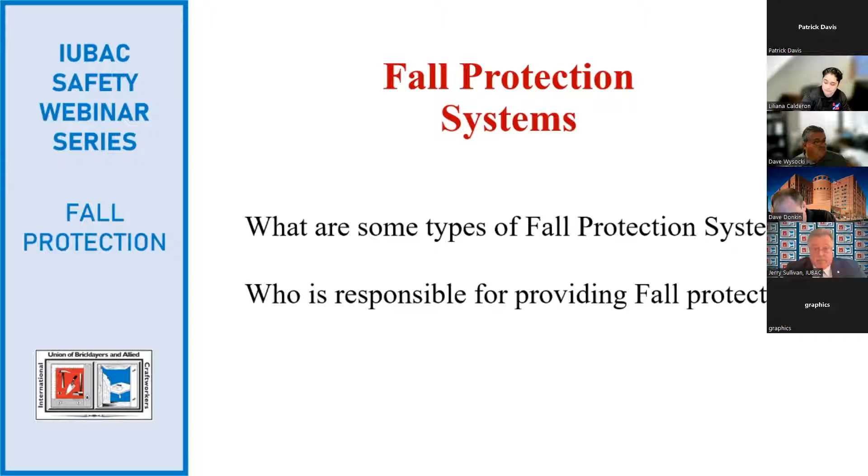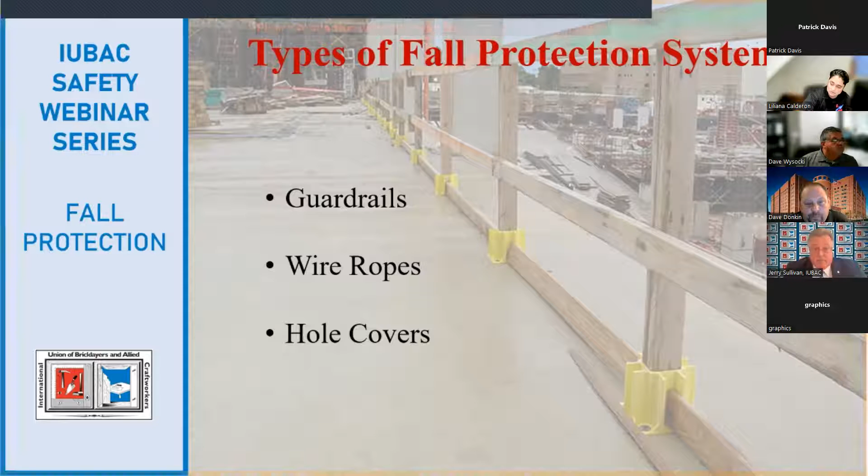So fall protection systems, I'll be covering fall protection systems. Here are 2 questions that you can answer yourself in your head, see if you get any of these right. What are some types of fall protection systems, and who is responsible for providing fall protection? So that's question #1. Types of fall protection systems: we have guardrails, wire ropes, hole covers, and here are some pictures to show you that.

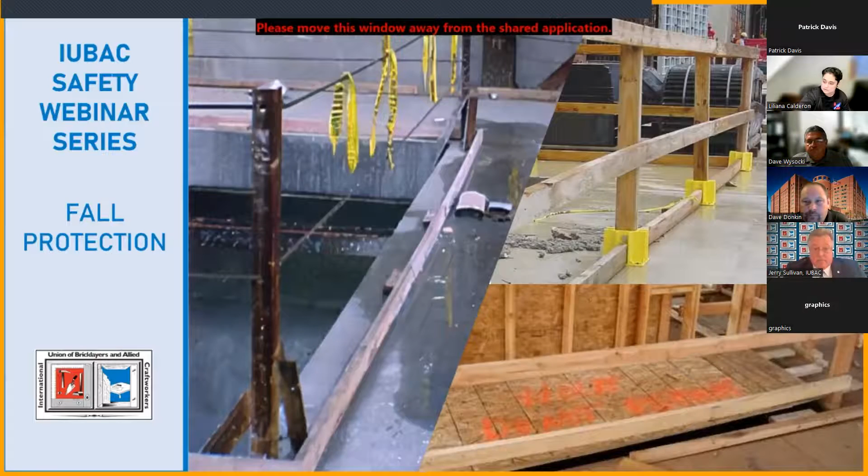So the second question. Lily, I hate to interrupt you. We're getting a little message that says that there's a window on top of your PowerPoint. Are you using the mouse to forward, or are you using your arrow buttons?

My space bar. Because I think it's opening a Zoom window on top, and we're getting a little error message. So if you try using your arrow buttons, it might not bring that window down on top, because on our end it's saying move this window away from the screen or something like that. Okay, thank you, Patrick.

So second question, who is responsible? OSHA standards state, which you can find in 29 CFR 1926 Construction Industry Regulations and Standards book, you can find these there. The 1926 502A2 says the employer shall provide and install fall protection systems.

I'm just going to read them down. The second one here is an excerpt: the employer shall provide a training program for each employee who might be exposed to a fall hazard. The third one: the employer shall ensure that each employee has been trained as necessary by a competent person, qualified in the following areas: the correct procedures for erecting, maintaining, disassembling, and inspecting the fall protection systems to be used.

So the employer should be training you as a worker to use these. You can't possibly use the controlled access zone or guardrails properly if you don't know what you're looking for, right? If you don't know that you're supposed to have a mid-rail or toe boards, the employer needs to train you.

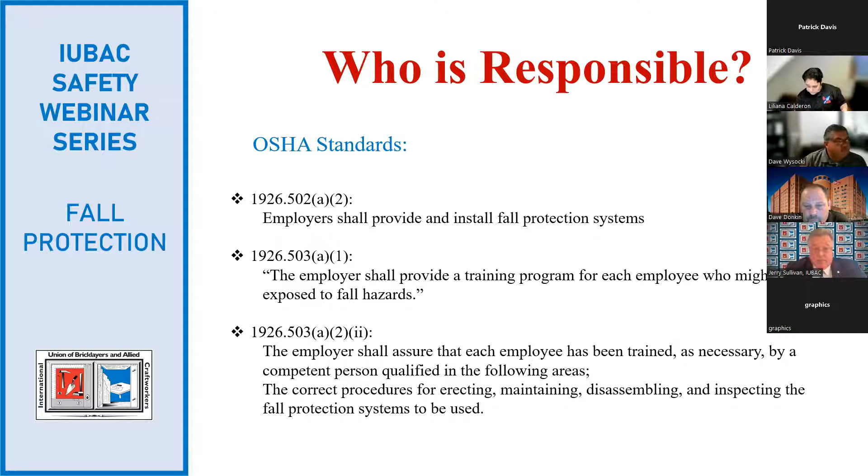So when do we use guardrails? Typically, we need to use them at the edge of a roof or at the edge of a leading edge. I know I've seen them around at every job site most of the time. If the general contractor is on their up to par, they'll provide it at any leading edge, right?

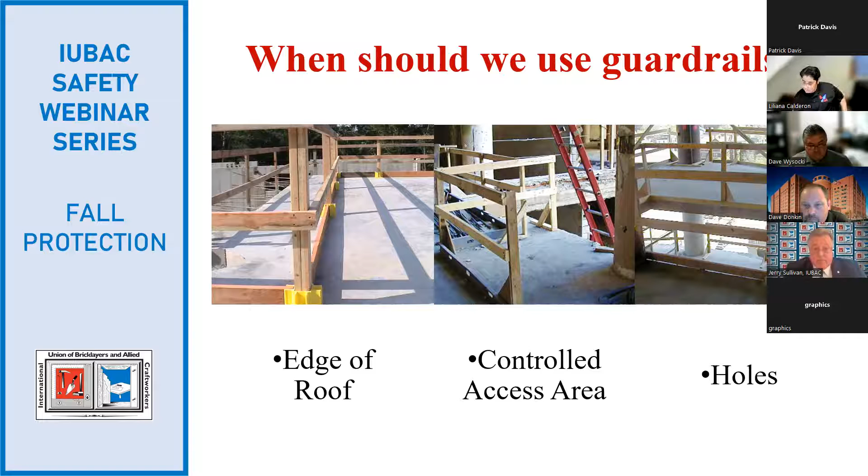So what are the guardrail system basics? You can find the regulation in 29 CFR 1926 502B. We need an upper rail. The upper rail needs to be 42 inches plus or minus 3 inches, so anywhere between 39 and 45 inches, and it needs to withstand an outward or downward force of 200 pounds.

Then we need a mid rail that has to be between the upper rail and the working area surface, right? So typically right in the middle, or at least 21 inches, and that needs to withstand 150 pounds inward or outward force. And then we need a toe board. It needs to be up about 3.5 inches, able to withstand 50 pounds of force.

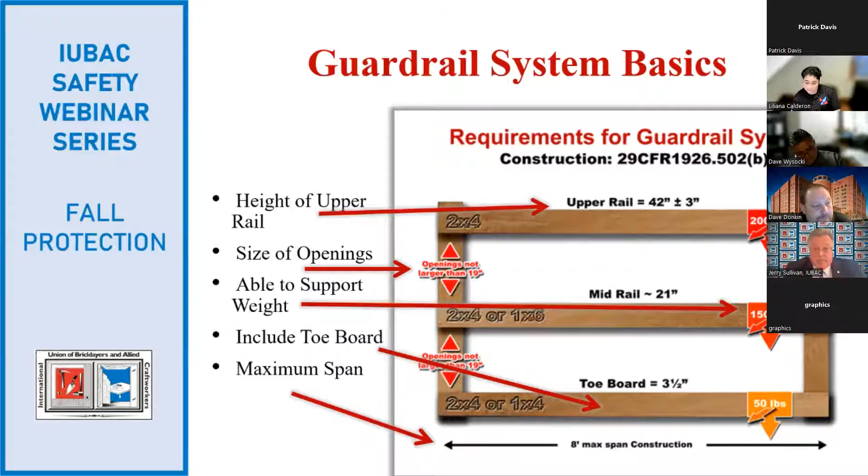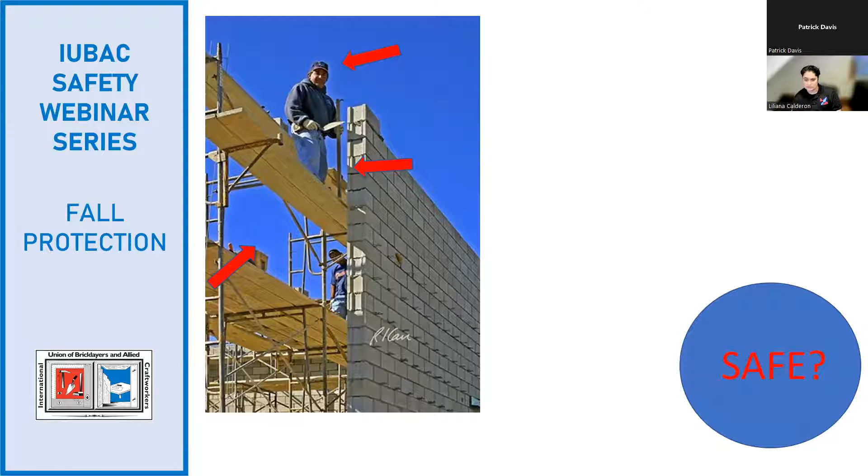If he were to just lose a step for a little bit while he's plumbing his wall on the back end, what happens? He falls, and he's not up a foot, he's up there. And the third thing we see here is there's no X braces in the back. That worker behind, walking on that platform, can trip, lose his balance, and fall over, creating a fall hazard.

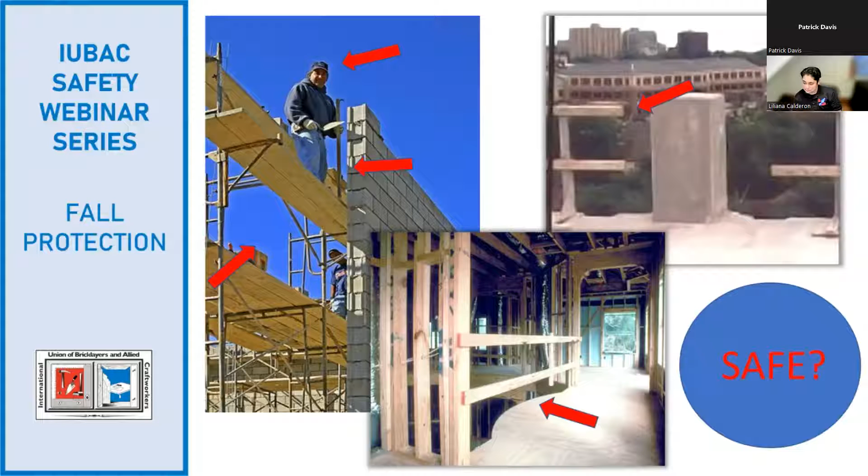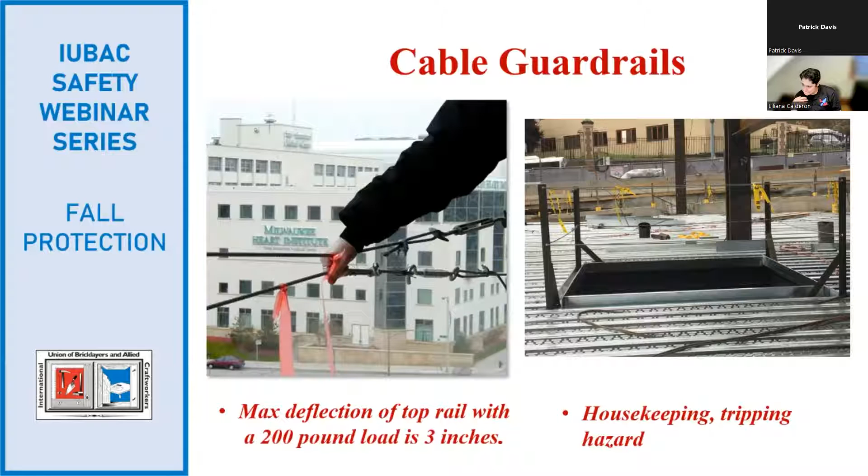So just like wood guardrails, the top rail cable system must be at least 42 inches high and resist up to 200 pounds. Wire rope needs to be secured and taut, like I said earlier, and should not have sharper edges, burrs, or projections.

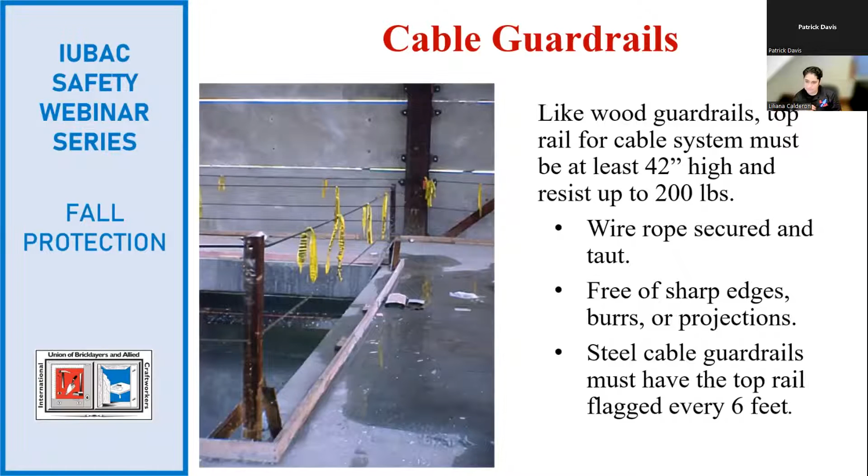Next, hole covers. A hole is a gap or a void of 2 inches or more. When we cover our holes that are on the ground or in openings on the wall, they need to be securely fastened, and they have to be clearly marked hole or opening.

What happens on the job site? Someone needs a piece of plywood, and they see one laying there. It's not marked. They pick it up and take it away, creating a hazard for someone else, because now that hole isn't covered. Or it can create a hazard for yourself, because you might forget it's there since you took that piece of plywood. So we need to make sure they're securely fastened and obviously marked, so that doesn't happen.

These are just some of these fall protection systems. Next, Patrick Davis will go over personal fall arrest systems.

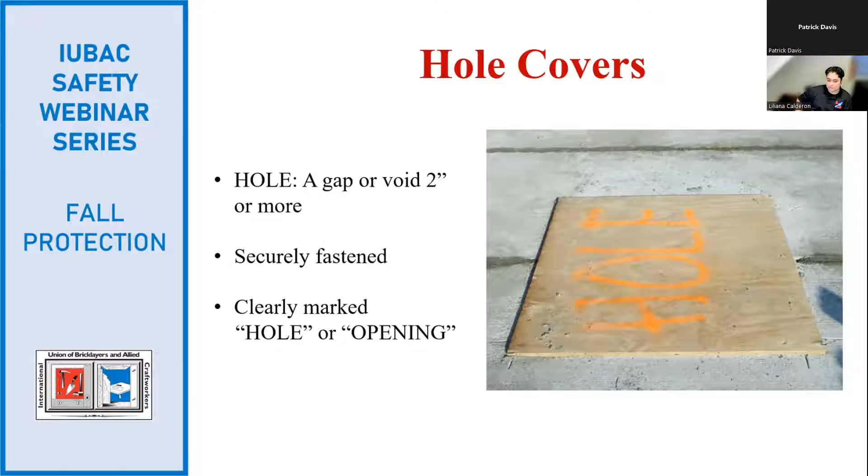All right, thank you, Lily. So like you said, Lily went over the conventional fall protection, meaning guardrail systems. So I'm going to go over personal fall arrest systems. This is one option.

Give me one second here. This is one option of protection after controls have been put in place, or when such controls are infeasible. Next slide.

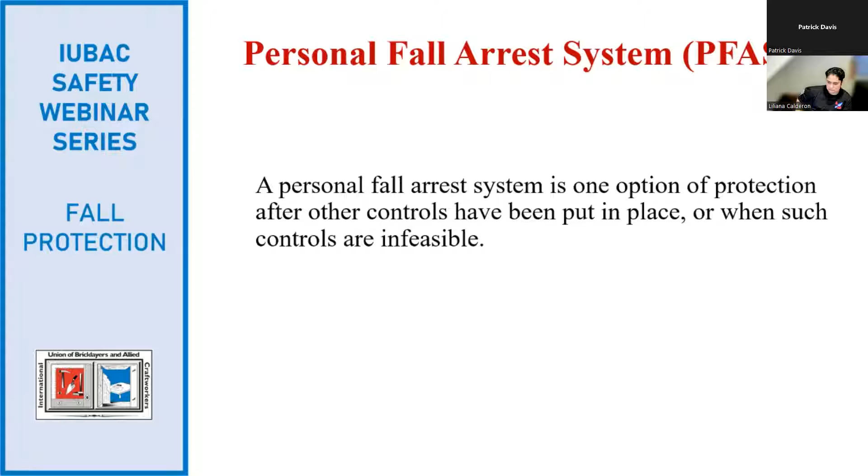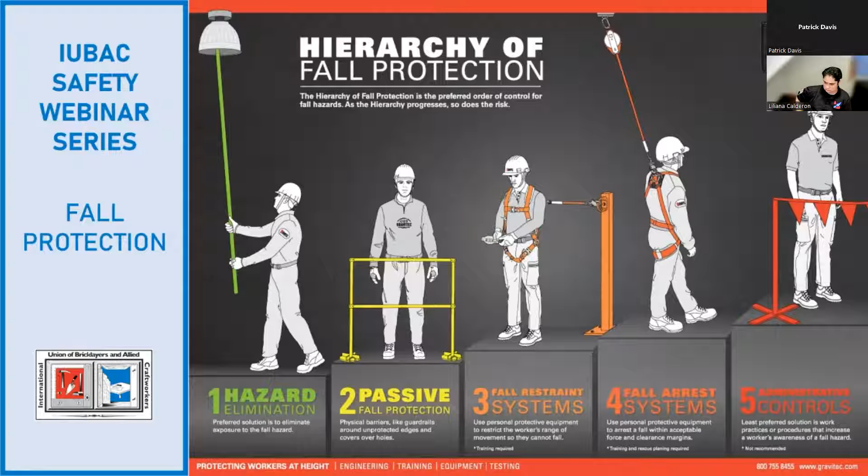Furthermore, in one of four of those falls, they weren't even using it at the time of the fall—meaning they might have had it on but weren't connected, situations like that. And then about 70% were among residential contractors, including roofing, siding, and some sheet metal sector contractors. Pretty staggering statistics. Next slide.

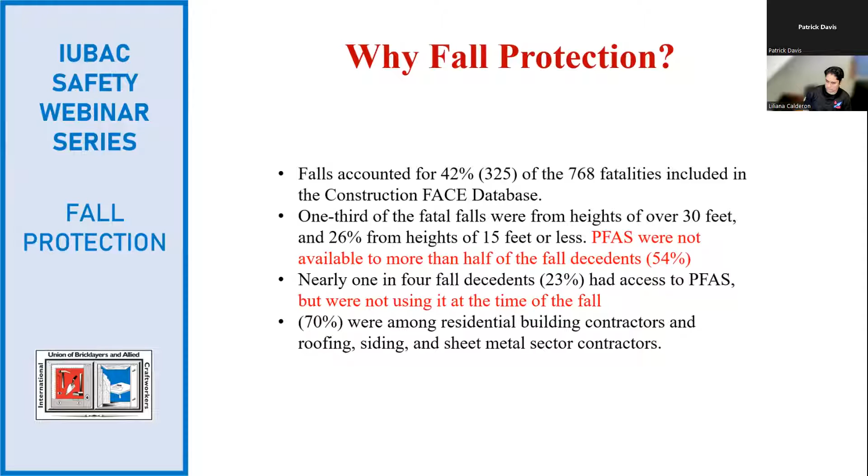So we're going to go over this for a little while. It used to be the ABCs of fall protection. They've kind of increased that a little bit to add more components of what's considered a personal fall arrest system. So we're going to go over the A, B, C, and yes, even the E's of personal fall arrest systems.

These are all examples. In 1926.502, anchorages shall be independent of one another. They must support at least 5,000 pounds per employee, or be used as part of a complete PFAS which maintains a safety factor of at least 2 and is under the supervision of a qualified person, meaning that qualified person must be supervising at all times if you're just going to maintain the safety factor of at least 2, right?

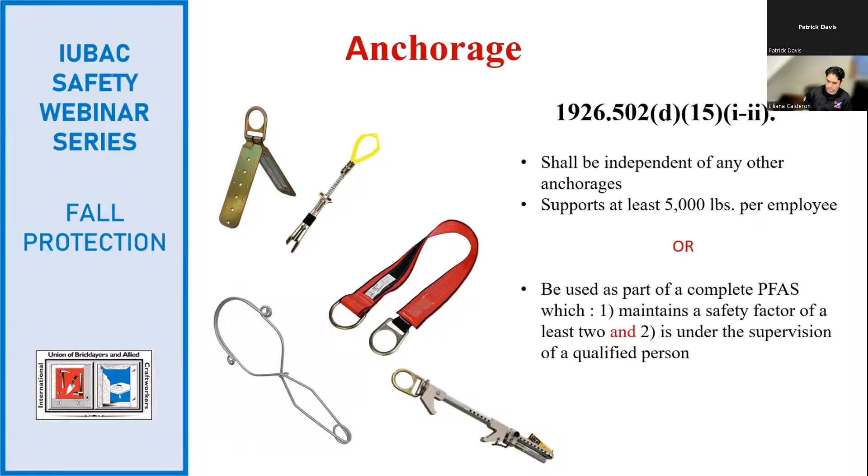As you can see right there, they're not independent, right? They're not tied to each independent anchorage point of at least 5,000 pounds. As a matter of fact, they're tied together. So if something was to happen, not only is one guy falling over, he's bringing his buddy with him.

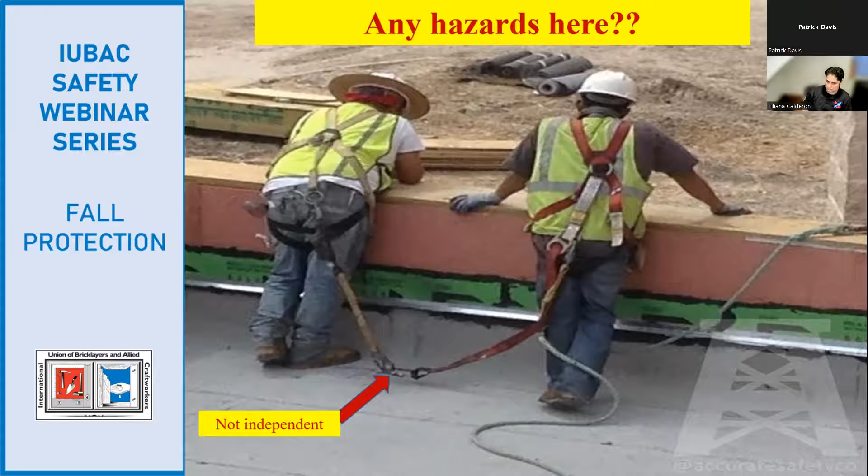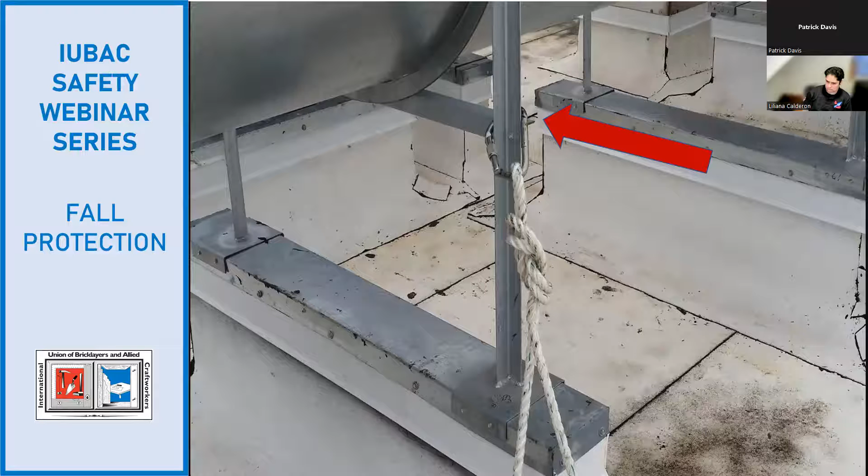Just as mentioned about meeting the 5,000 pounds for an anchorage point, as you can see right here, you simply have a carabiner hooked to a basic 1 inch by 1 inch piece of metal strut. It's unfathomable to think that this possibly meets the 5,000 pound requirement per the OSHA standard.

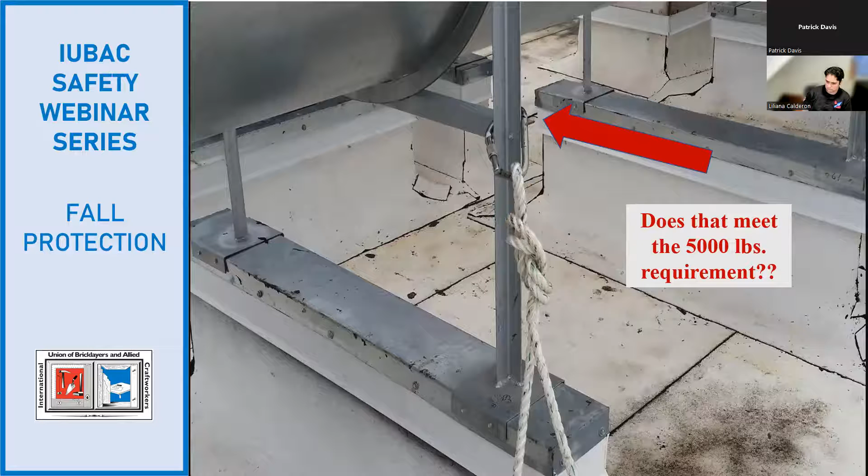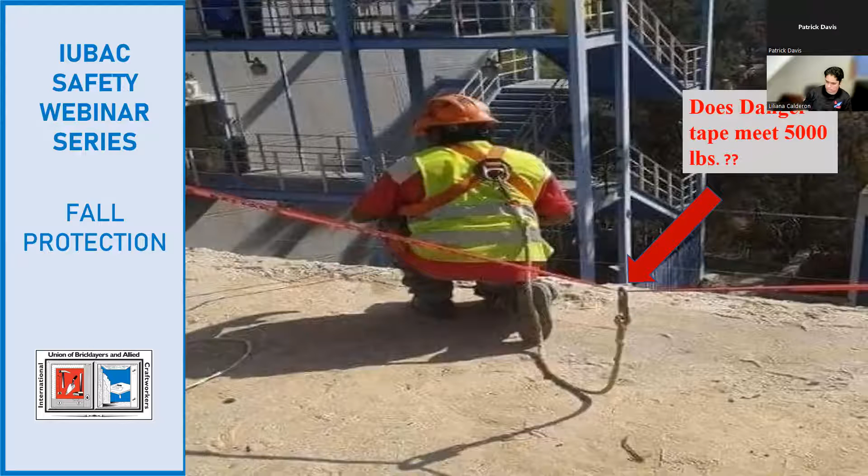So we've covered the A, now we're on to the B, the full body harness. Full body harnesses are designed to hold the wearer upright in the event of a fall. If you go back years past, to the era of body belts, which really wasn't that far long ago that they've been removed.

I think it's probably like 1992 where you were still able to wear a body belt. When you wear a body belt, yeah, it might have held you, but most likely you would have been flipped upside down or contorted in some way. The body harness is designed to keep you upright, and it also distributes the energy from the fall across the body of the wearer.

It also comes in all sizes to accommodate all sizes of people, including harnesses designed specifically for women. It may also be specialized based on the application in industries such as confined space and others.

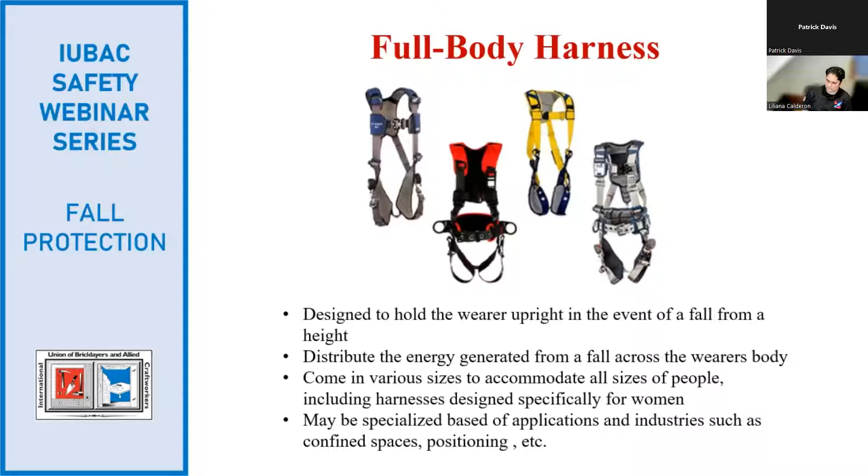So as I mentioned before about the types of applications, harnesses must be matched to meet the application they are used for. Harnesses are specifically designed for different industries. One being arrest, basically all fall arrest. You have a P type of harness, which is for positioning, pole climbing, and formwork. You also have a descent type, which would be for emergency evacuation.

You also have an E type of harness, which could be considered for confined space access, where the D-ring attachment point is in the center of the chest, as opposed to conventional fall arrest harnesses where the D-ring is located in the middle of the back. They also have ladder climbing harnesses for those who do tower work, and the R type of harness for rescue, which is tower rescue.

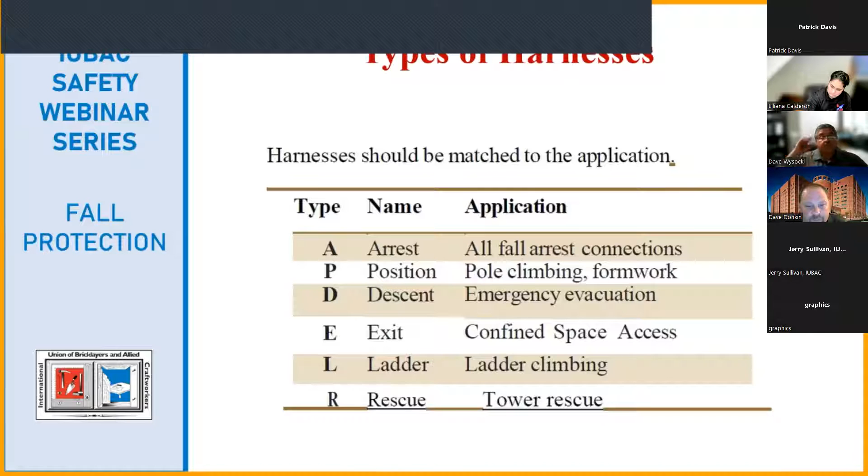Next slide. How about this setup? Do you think that they're wearing this properly?

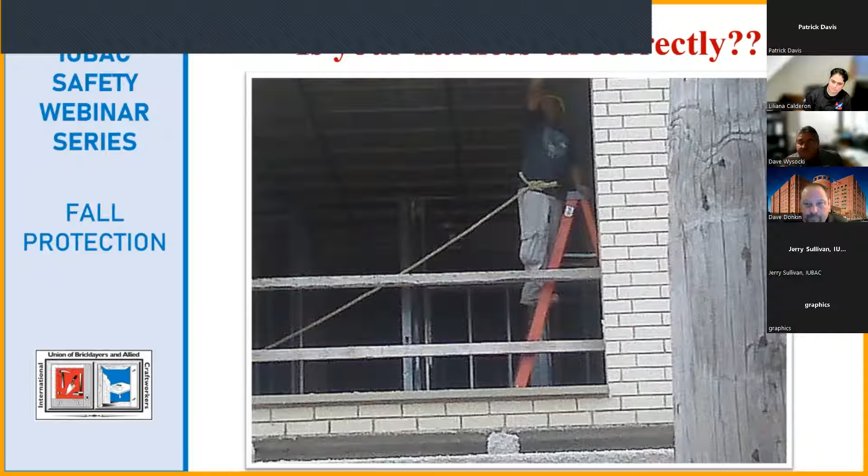Next slide. So when it comes to personal fall arrest systems... something's blocking the middle of the top of my slides where I can't see. Give me one second, I'm going to go to my own slides too.

So when it comes to personal fall arrest systems, competent and qualified persons, if you read the language there, basically fall arrest systems and components must be inspected before initial use and during each work shift for all the different types of damage that could occur, anywhere from mildew all the way down to deterioration.

Body belts and lanyards must also be compatible with all the connectors you use. One of the most important points to recognize, and I think Lily touched on this a little bit at the end of her presentation, was employers shall assure that each employee has been trained as necessary by a competent person, qualified on correct procedures for use, operation, and inspection of personal fall arrest systems.

In Lily's presentation, I just changed the language a little bit, but in that specific quotation out of OSHA standards, it says for all fall protection systems. I adapted this one to mention that when it comes to personal fall arrest systems, it's no different than any other type of fall protection system. Next slide.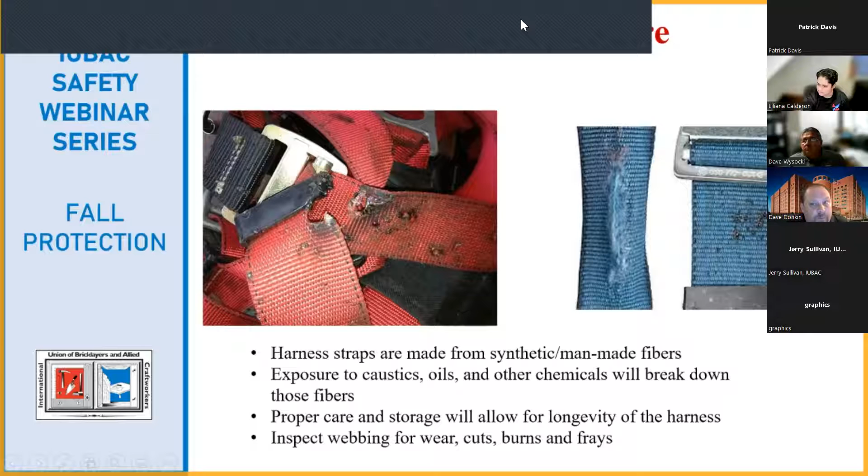One second, something happened on my end.

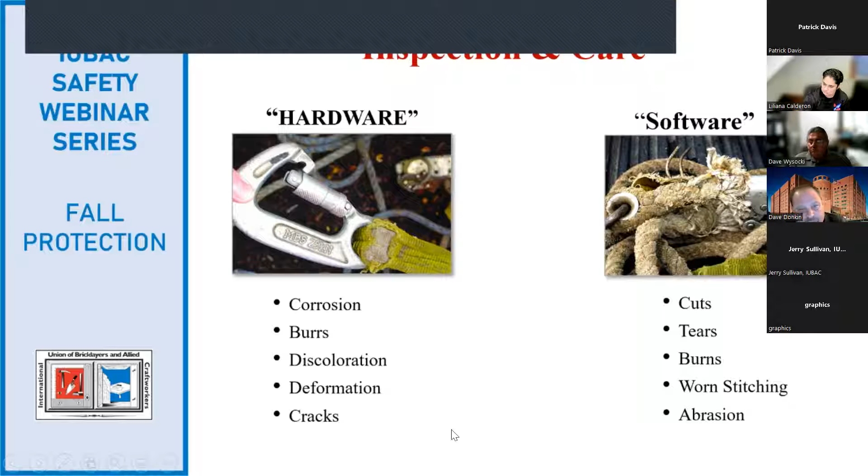So when it comes to another inspection and care, regarding the hardware - that's the hardware, considering like the buckles, anything that's metal in nature - you want to watch for any corrosion, some burrs, discoloration, deformation, cracks.

As far as the software is concerned, and that would be a lot of your lanyards, again, the harness, the actual straps on the harnesses, you want to watch for any cuts, tears, burns, worn stitching, or any type of abrasion. Next slide.

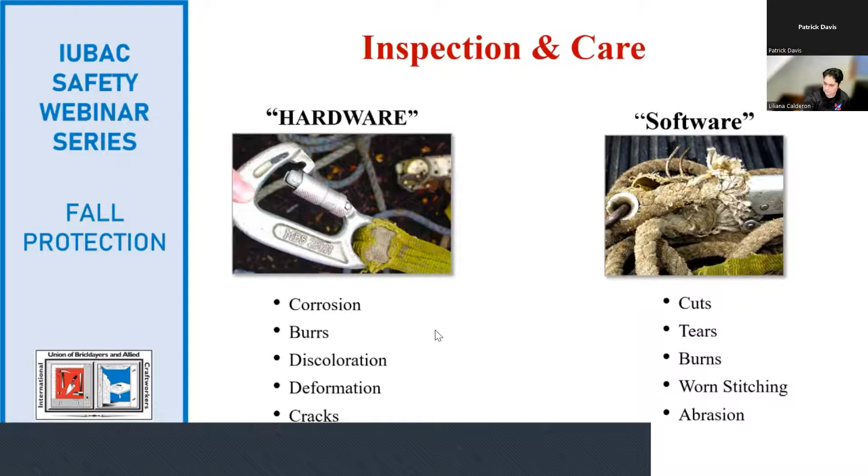There are so many different manufacturers of fall protection and PFAS, personal fall arrest systems. Each specific manufacturer is going to have these inspection lists, and you can go on the manufacturer's website to actually find these type of checklists for all parts of the PFAS - that's the harnesses, the connections, the lanyards, etc. So next slide.

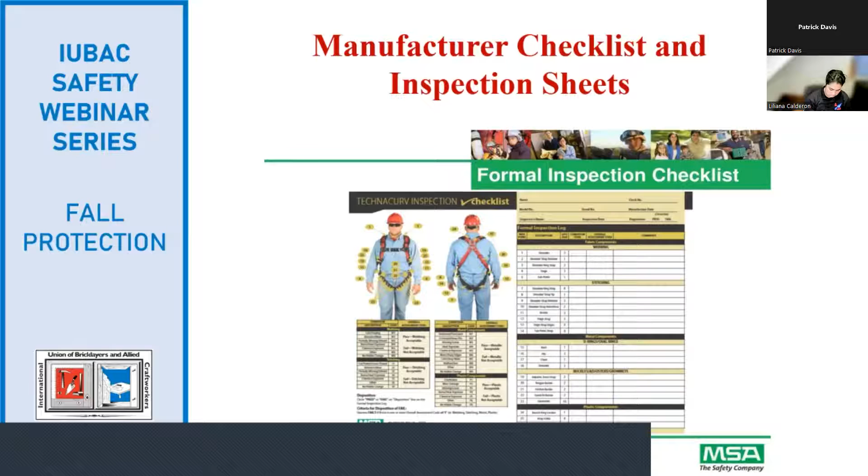Is that good, Dave? Yes, that's good. So again, this is just an example of the beam clamp that was mentioned earlier about one of the anchorages. Is there any potential hazard right here? Yeah, the potential hazard is that you have that connection and the beam plate ends before the column, so in this situation that beam clamp could slide off into that open end, resulting in a fall.

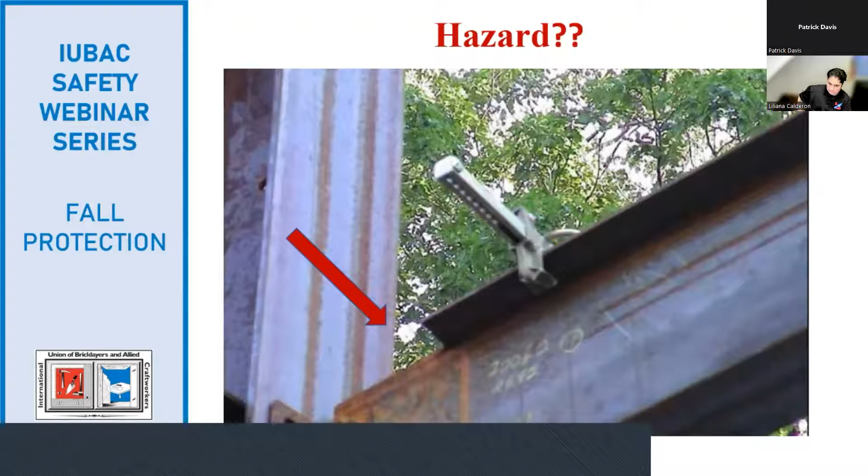Next slide. So we're into the D part of the PFAS - this is the shock absorbers. By OSHA standards, they're designed to reduce forces of fall, can deploy up to a maximum of 3.5 feet, and they will limit the arresting force on an employee from about 900 to 1,800 pounds.

The next slide will show exactly what that means. It's always placed above the D-ring, not near the anchor. This is the part that needs to be connected to the person, to the harness, on the harness side of the individual - not at the connection point. Next slide.

This is just an example of what's considered an external shock absorber, where it's encapsulated in that sleeve. Then you have the internal shock absorber on the other lanyard, where it's already kind of built into the size of the harness, the size of the lanyard. Next slide.

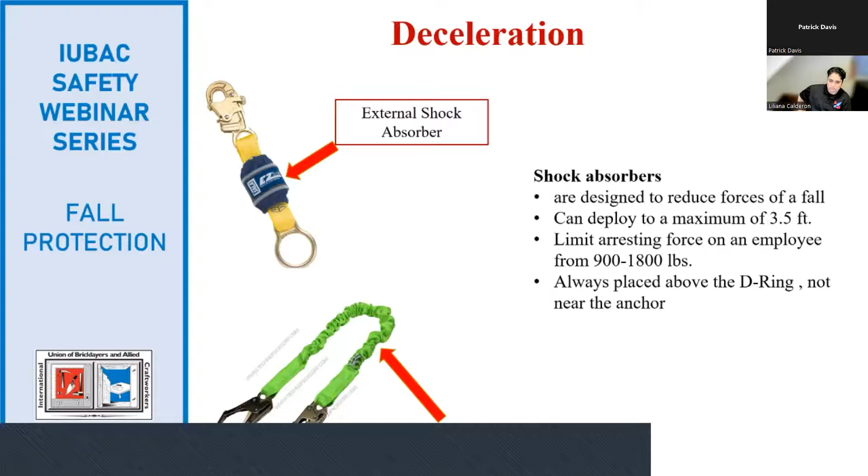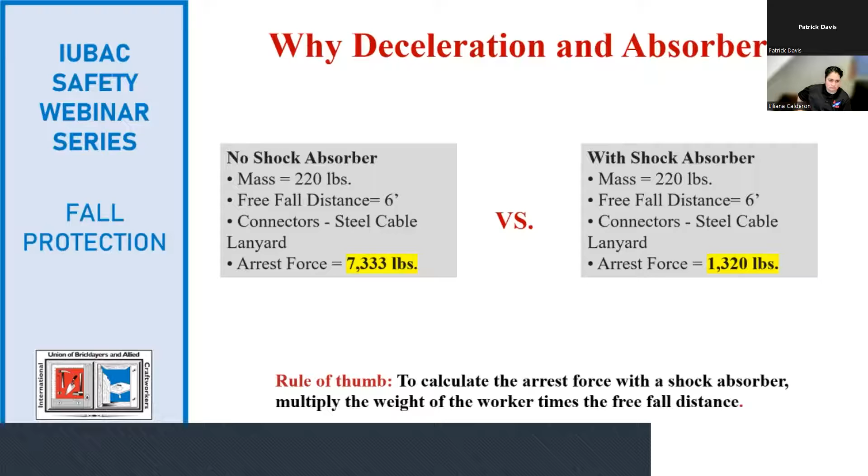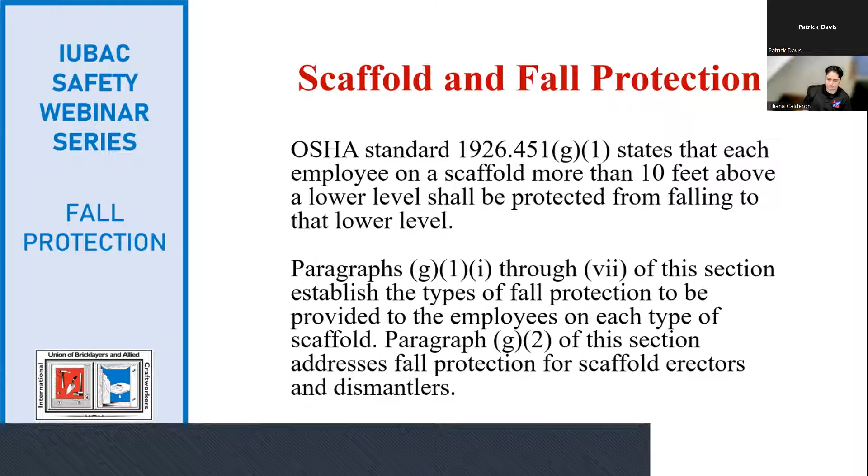This shows what type of fall protection is required on different types of scaffold. The ones highlighted are the ones we use the majority of the time: aerial lifts, obviously personal fall arrest system, a boatswains' chair, personal fall arrest system. And there was a question in the Q&A about what harness would be best for a bosun's chair.

It's a personal preference when you're looking at fall protection harnesses. We just attended a safety webinar, and the guy says, if you put a harness on and you feel comfortable, you put it on wrong. So any harness you want to get, obviously the more money you spend, the more comfortable they are. But any harness will keep you protected on the bosun's chair.

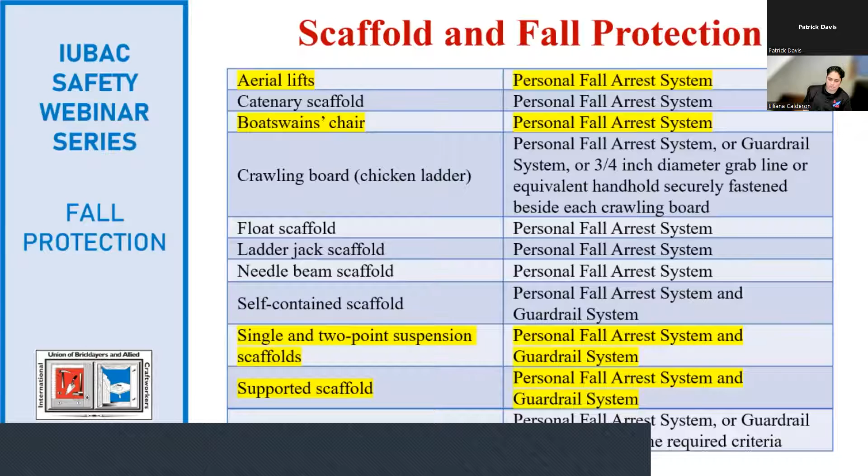Single and 2-point suspension scaffold, obviously, you need both personal fall arrest systems and a guardrail system. Supported scaffold, depending on what type of scaffold you're on, you may need both, especially if you're an erector or dismantler. You might want to wear a harness and be tied off while building the scaffold. For the most part, once it's built, the guardrail system will be sufficient.

Some of the most common scaffold hazards out there, we're talking obviously falling off the scaffold is one, but also falling objects and falls from an elevated position. Some equipment-related factors are improper use of guardrails or improper use of lifelines.

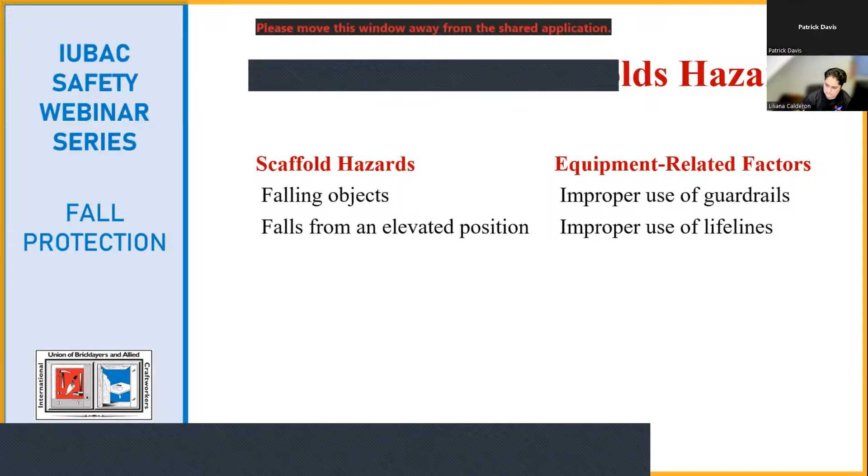Here in this scaffold picture, obviously you can see there's an open end of the scaffold. They are tied off, you can see his lanyard is connected to the rope grab on his lifeline, but the end of the scaffold is wide open. They need to put some type of barrier up there.

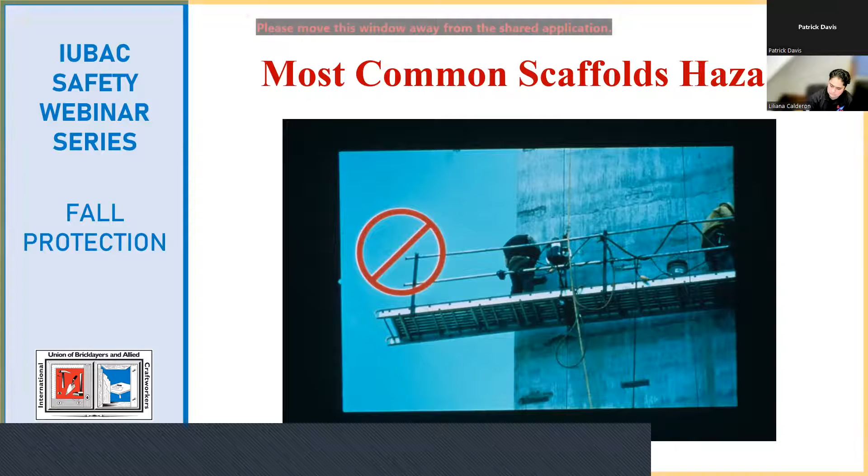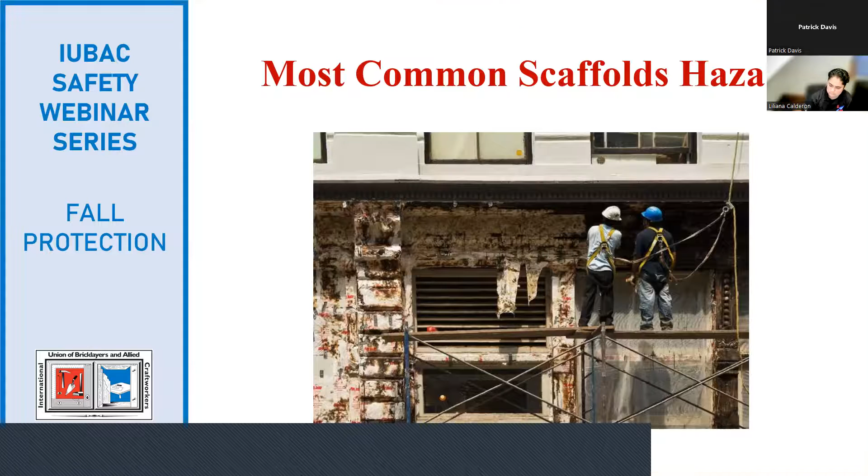So here on this picture, what do you see? What's not right? If you look at the right, they're both tied off to the single rope grab there. Those are designed for one lanyard, one tie-off point, not for two people. Also, the scaffold, they got plank on there, it's not fully planked, and there's no guardrails on there protecting them.

Some of the human factors when we come to scaffold and falling hazards is improper use of PPE, or the inexperienced worker. Talking about the inexperienced worker, it is required that your employer shall train you on the type of scaffold you're going to be using and what type of hazards are associated with that scaffold.

That is one of our keys at our training centers. We obviously want to train our members on the proper guardrail system, personal fall arrest, and what type of fall protection is required on the scaffold. But unfortunately, it goes back to the employer because we don't know what type of scaffold we'll be working on. So a person that's qualified on that job site should be training you.

Also, lack of monitoring by the site supervisor.

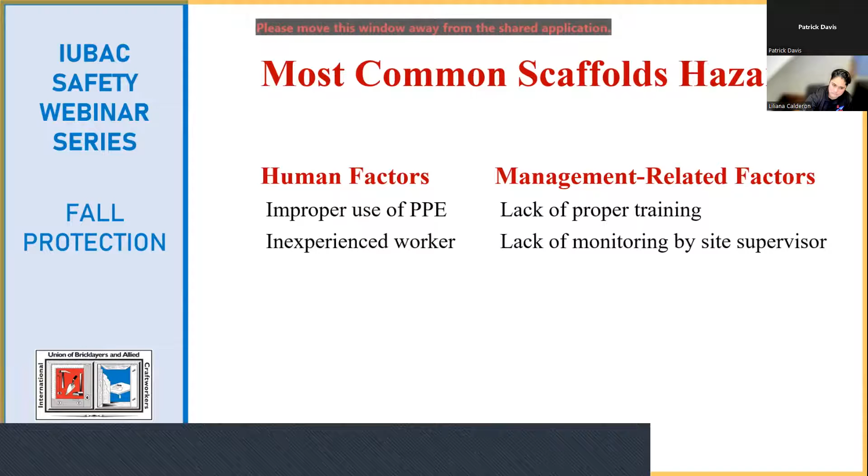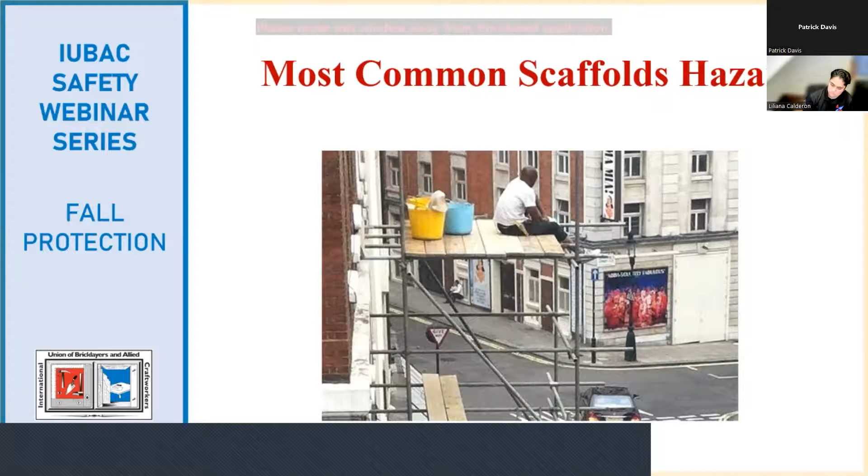But also general contractors out there would want a mid rail put in there, whether it's a 2x4 that spans across the scaffold legs at that midpoint, because that is a pretty big area that someone could fall through.

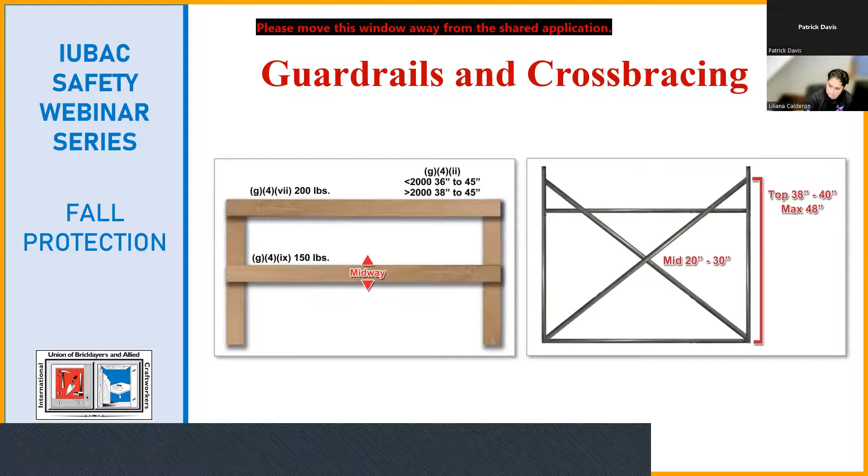Here's a little fatal fact. Miguel R. fell 5 stories to his death when his scaffolding collapsed. He was wearing a safety harness, but it wasn't tethered to the building.

So here, obviously, he had the proper equipment, and Dave talked about in his presentation. We have the equipment, we just got to make sure we use it. So he had his harness on, but did not tie off. And unfortunately, they forced this worker with only 2 days on the job to pose as the foreman, so that can go back to the lack of training on the employer's part.

Witnesses said the worker mistakenly stepped into an area where the plywood bridge was supposed to be erected, so obviously untrained.

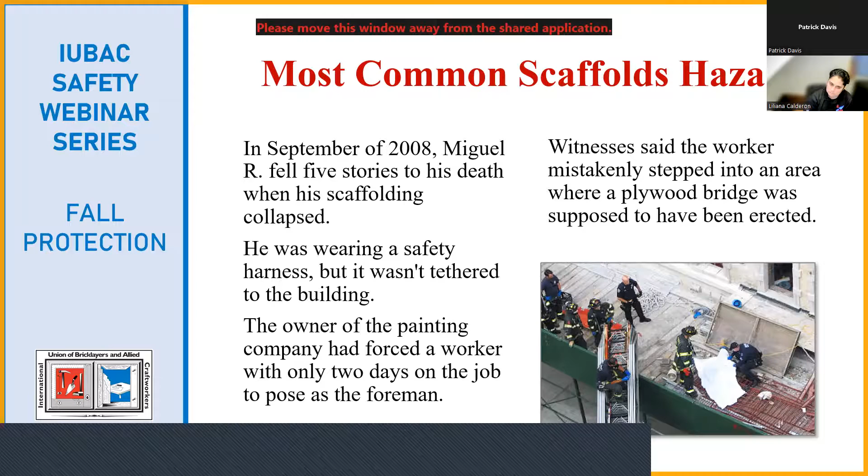So when we're talking about scaffolding with a competent and qualified person, the scaffolds must be designed by a qualified person and must be constructed and loaded in accordance with that design. For employees erecting or dismantling supported scaffold, a competent person must determine if a greater hazard may result from providing safe access and fall protection measures.

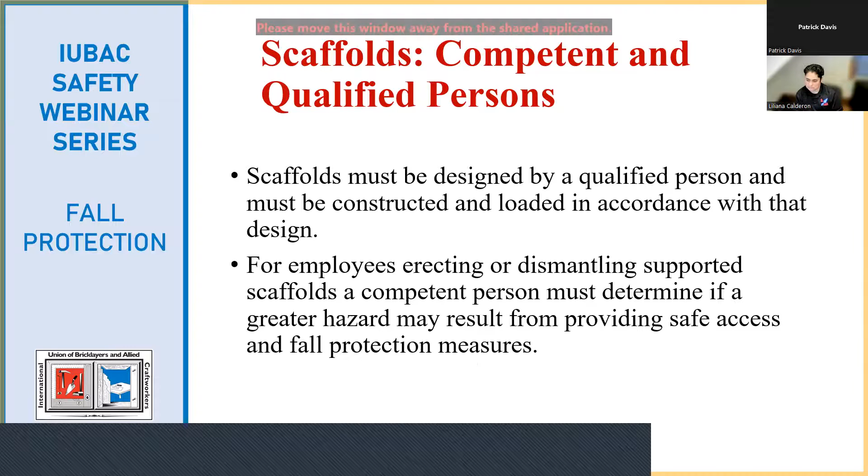The competent person must determine the feasibility and safety of providing fall protection for employees erecting and dismantling supported scaffold. This question we get asked a lot about when you're building or erecting a scaffold: does the erector have to be tied off? There is in the OSHA standard, for the erector dismantlers.

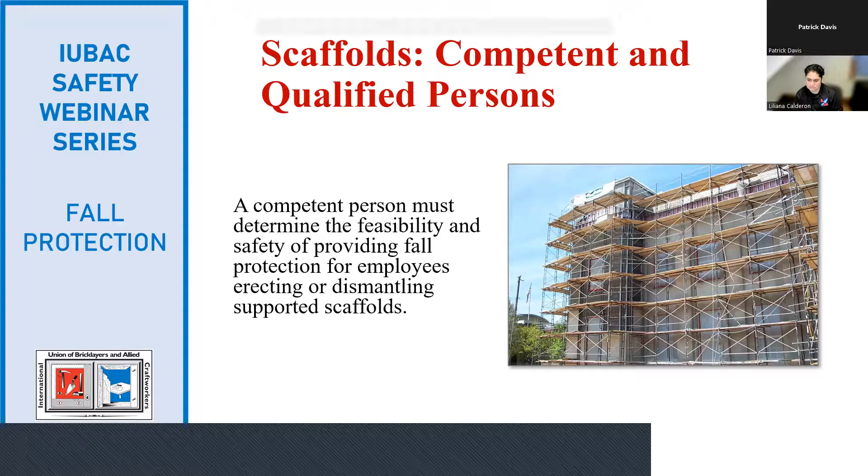We get that question a lot. Can we tie off to the scaffold? It is up to the manufacturer's recommendation that that scaffold meets the 5,000 pound tie-off point.

Some of the resources where you can find some of these letters is on the Scaffold Access Industry Association website, the SAIA. They have a resource drop-down box. They talk about supported, suspended, fall protection and tying off to the scaffolding, but it's going to be up to the manufacturer's recommendation if their scaffold meets the 5,000 pounds.

Also, when we're talking about the fall protection when building and erecting and dismantling scaffold, a fall protection plan should be in place. Obviously that is critical to the safety of our members, the people building, erecting or dismantling the scaffold. And that plan has to follow OSHA requirements depending on the type of scaffold that you are using. So one plan is not a one size fits all. It all depends on what type of scaffold they're erecting or dismantling, and they have to have a plan in place.

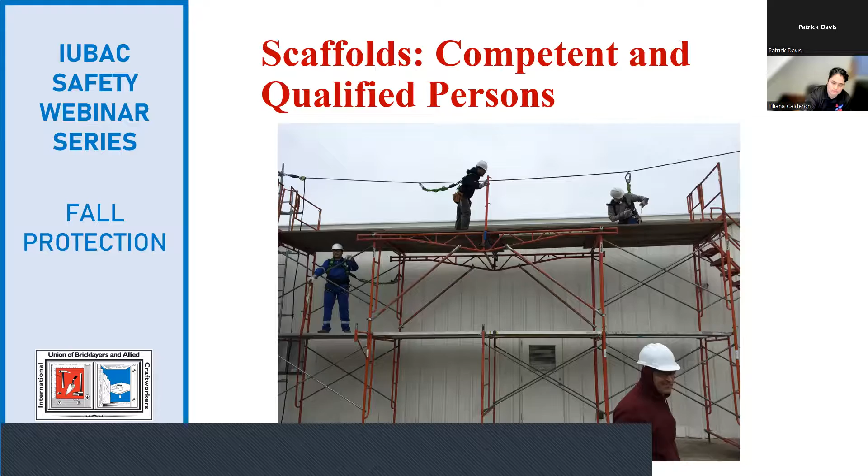Here's the fatal fact. An employee was constructing the third level, a tubular welded frame scaffold. While standing on the second level, the scaffold was erected on a concrete floor. Each section was 6'5" high and was fully planked. He was setting a third level frame into the pins. On the second level, the frame flipped to one side. He fell to the ground and sustained a fatal blow to the head.

So here, no tie-off point. There's a manufacturer out there that has a trailer fall protection. It doesn't go up to, I think it goes up to 20 feet, but they use it at residential. You back the trailer off. When they're doing shingling work, you could tie off to it. That could have been a case here where it could have prevented the fatality, or tying off to the frame. Maybe tying off the frame, he would have had a swing hazard, but maybe he wouldn't have hit the concrete.

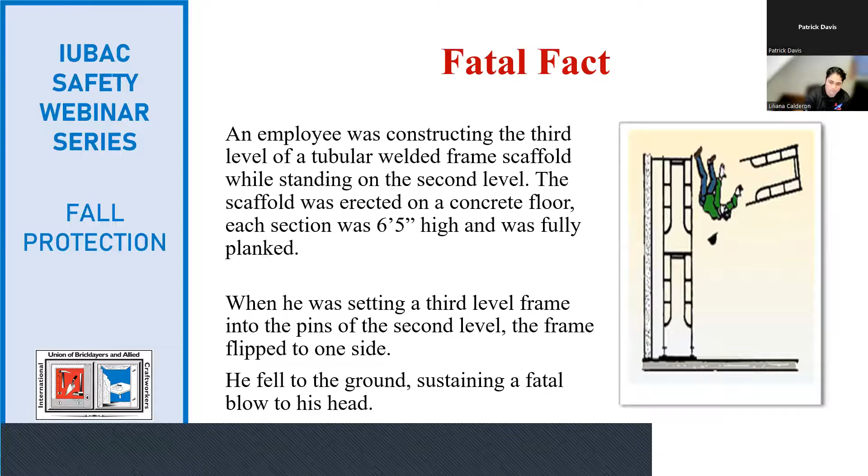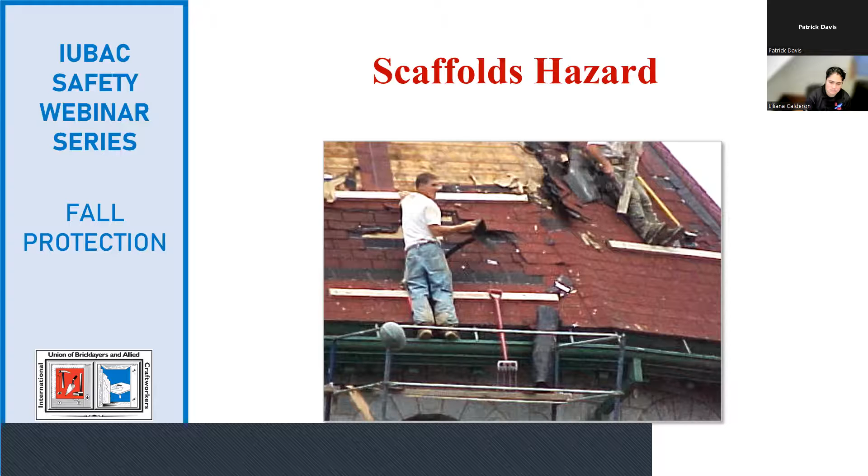And here's just another, he's definitely above 10 feet, according to OSHA. Obviously there's a lack of fall protection.

Falling object protection, there's nothing here, no netting. He's got that rake sitting on there, that has a chance to fall off of there.

We as bricklayers, when we're working on the scaffold, one question we get a lot is, I want to stock the scaffold the night before. Well, according to the OSHA standard, any material shall not be stored on scaffolding or runways in excess of the supply needed for immediate operations.

That's under material handling, storage, use, and disposal. It says immediate operation means work that will be done in the shift. So stocking the scaffold the night before is fine, but we need to protect against falling objects. We might have to put up a screen or netting, and make sure toe boards are in place, so everything has to be in order for us to leave material up there overnight.

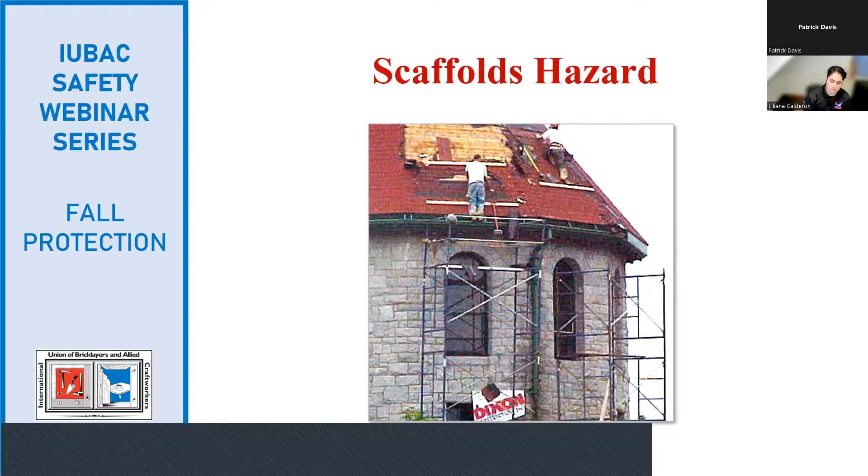Next slide, please, Lily.

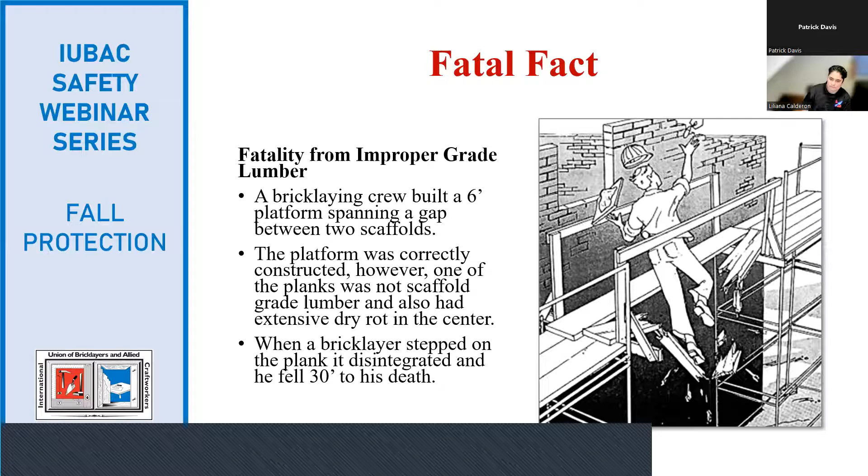Next slide, please, Lily.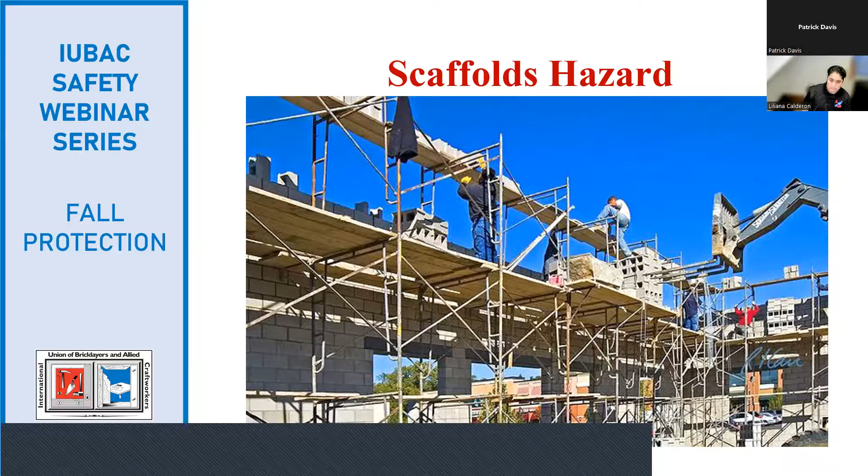Here we've got a hydromobile scaffold. They do have guardrails up on the scaffold, but there's no mid rail and no toe board. Missing guardrail, a chance for someone to fall off. Also, on the end, it's hard to see, but they don't have it blocked off, so that person on the front can walk all the way to the end of the scaffold.

Also, on the bottom right of the picture, you see two planks sitting on an outrigger, and on that outrigger they have a piece of 2x4 on top. There's also no guardrail on that end, with a chance someone could walk to the end and fall off the scaffold.

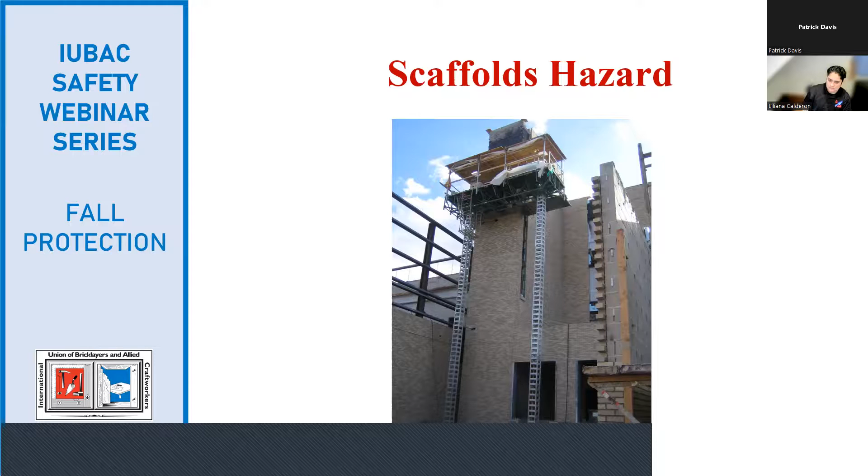And with that, next slide, if there's any questions.